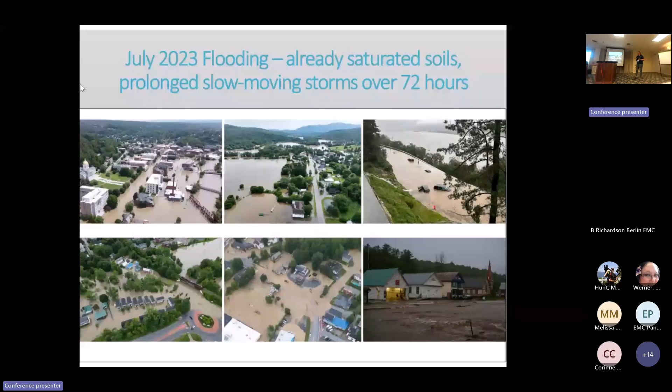This was interesting because I showed this last year at the National WARN Conference, and I was thinking, Florida sees 22 inches of rain all the time, and we only got 9 inches of rain, but everybody was pretty impressed by that. Just with our topography, with the narrow mountain valleys, they did understand 9 inches of rain here is a lot different than 9 inches of rain in Florida.

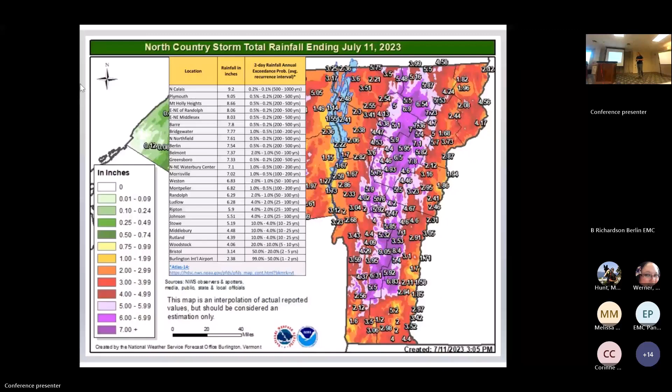So compared to Tropical Storm Irene - in 2023, WARN was activated. In 2011, I don't know if it was officially activated. There was some information sent out through WARN, but I don't think there was any equipment shared through WARN. So in 2023, WARN was activated and functioned pretty efficiently.

One specific request came in the first few days - it was a little bit of chaos. Nobody was quite sure what they needed, they just knew things weren't working. So it ended up we just had to start sending folks out to these water and wastewater facilities to get some eyes on and say, okay, where should we start? It was just so overwhelming in some of these places.

Another great thing that was different was the availability of social media and mobile technology. We talked to Brandon and Wilmington and other communities that were hit pretty hard during Irene, and they said it was just so different - now you have your phone in your pocket, you can instantly take pictures of things that are broken, do all your documentation for FEMA, and text somebody to get what you need.

Virtual meetings were also a huge plus. Having the FEMA applicant briefings online was really great for our folks, especially those at their water and wastewater plants. They hadn't left for 48 hours and didn't really have a chance to travel somewhere else besides what they were working on.

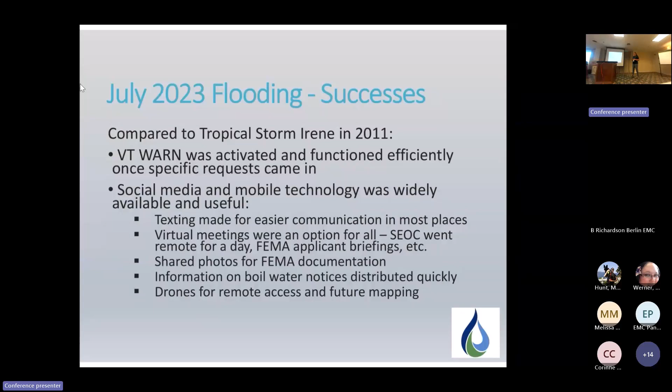Same thing with the drinking water side, the boil water notices, all of that could be distributed much more quickly. We kept an eye on what the chatter was online and on social media. Drones were available for some remote access and to help with mapping.

So, drinking water system impacts from the July 2023 flooding: there were over 20 water systems on boil water notice. Most of those were issued out of an abundance of caution. Some were due to damage in the distribution system, like main breaks, leaks, or pressure issues. Two surface water systems had turbidity issues. Some had floodwaters over their wells, or weren't sure how high the water got because they couldn't access that area.

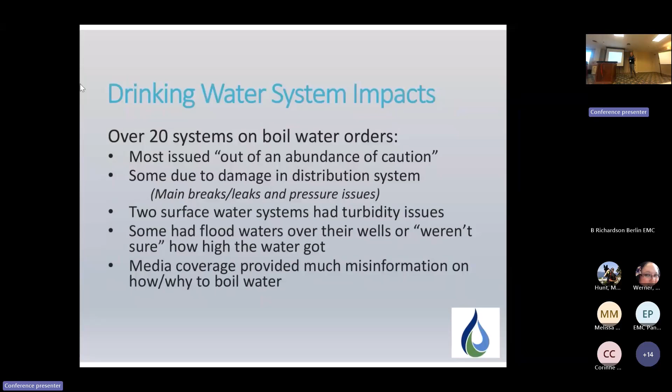One of the challenges definitely was media coverage. There was a lot of misinformation on how or why to boil water. We caught VTDigger saying that boiling water could remove fuel oil, so we quickly got that corrected. That's definitely something we want to work more with the media on in the future, just to make sure it's very clear how you need to boil your water and what that can actually remove.

So, do not drink orders. I mentioned Woodstock already, which serves about 1,700 customers and most businesses in town. The system had trouble keeping up with demand because of all the breaks and leaks they had, and they connected a non-NSF certified fire hose to fill their storage. The state did not like that, so they were put on a do not drink order until that could be corrected.

And then in Morrisville, they serve about 2,800 customers, most businesses, plus the hospital. Their sources were submerged by river flooding. The operators were pretty sure the pumps had been shut off so that water did not reach the treatment plant or go into storage, but it was unclear. Nobody was sure what happened at that worst moment.

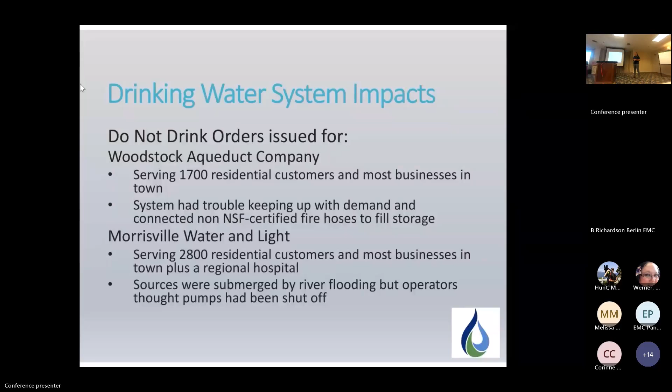So I was going back and forth between Johnson and Hardwick a lot last summer, and I really wanted a Diet Coke at the Morrisville McDonald's. Unfortunately, they were following the boil water notice. It went to boil water at that point, so they were following the notice, but no Diet Coke that day.

So at the Johnson wastewater plant, this is kind of where we started our flood response last summer. This is an SBR, a sequencing batch reactor, the type of wastewater facility - sorry, some of this is a little technical. This is a very small wastewater plant, even for Vermont: 0.15 million gallons per day coming through there.

Their entire plant was submerged to 7.5 feet. You'll see the picture in a minute. They have two operators there that run that plant, but they also run another wastewater plant and three water systems.

So this is pretty typical for a situation in Vermont. The operators are spread pretty thin, and it's hard to prioritize in some cases, like where do we start, which system do we work with first? Here, it was pretty clear Johnson had the most damage, so that's where they started.

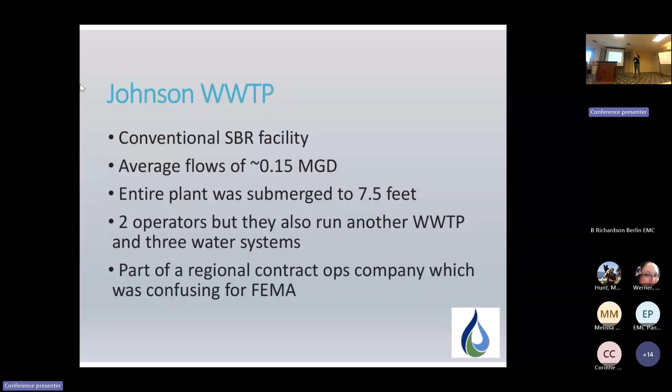Another thing that was a little different here, probably different than other states too: there's a lot of municipal systems, and a lot of other systems in Vermont are run by contract ops companies. So that's been a little confusing for them in working with FEMA, that there's this private company that runs the water system, but it's owned by the Village of Johnson, located in the town of Johnson. So it's been a lot to kind of get figured out, and as those FEMA folks turn over, it's explaining everything again and again.

So here the red circle is where the wastewater plant is. It's kind of right where the two rivers converge, so they got hit from both sides a little bit.

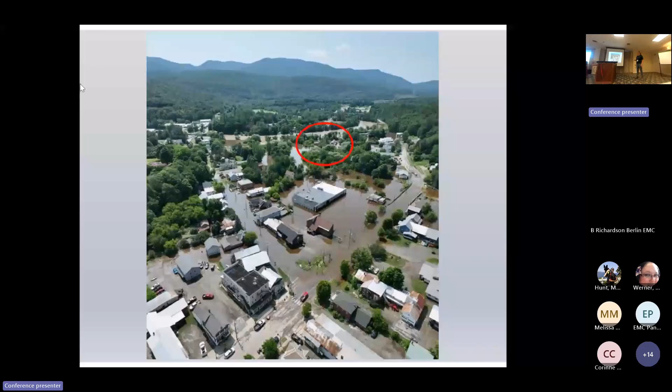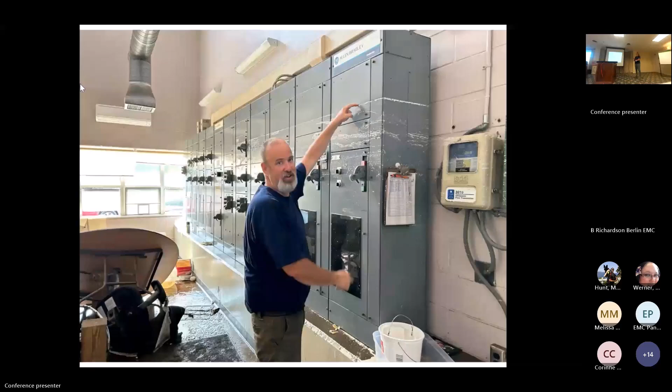Through WARN, the city of Burlington provided a 500 gallon per minute Godwin trailer to pump the decant off of their holding tanks and out of their SBRs. We also had a bunch of smaller pumps in there, a generator, dehumidifiers, and provided them some KN95 masks, again, that couldn't be sourced through other means.

The car floating in the river on Railroad Street tore off their 8-inch ductile iron sewer crossing. The replacement pipe ended up being sourced through AOT, which was great. WARN is good for the smaller stuff, but not a lot of facilities have 8-inch ductile lying around, so we had to go searching through other means. I think it did go through the SEOC to get to the Agency of Transportation.

The WARN trailer was actually used to hold a chlorine tank. The system was asked by the state to do emergency disinfection, because all across the news and media it was like raw sewage going into the river and affecting our recreation. At that point it's like 99% flood water - it's not like what people picture as raw sewage, and what you could see coming out of the pipe was clear. So it wasn't raw sewage, but they were asked again to do emergency disinfection while their ultraviolet system was down.

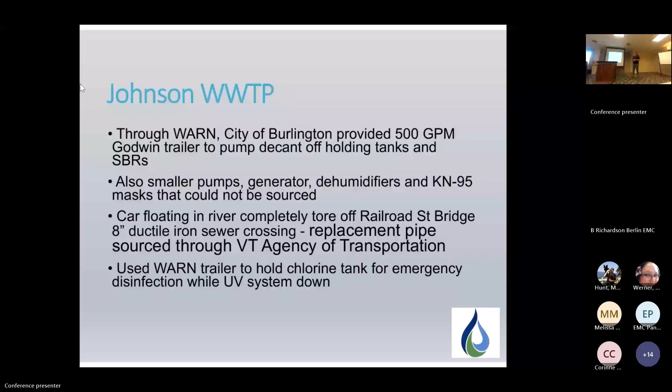So this is the brand new pump that came from Burlington, and the operator that they sent, and it ended up working out really well in this case. It's also figuring out where you can get the truck and trailer from, and then which roads are open, which bridges are open, and who has to drive the furthest around on kind of sketchy roads. So it's a little bit of a game, but this worked out pretty quickly here in Johnson.

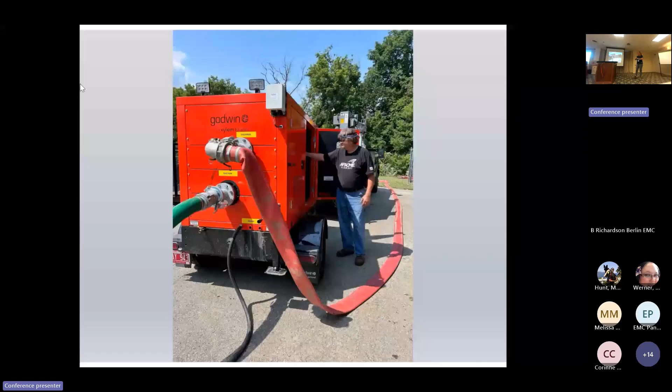How many of those are in the state? Is that the only one? No, South Burlington has some, Rutland.

I know some of the bigger systems have them, but it always comes back to - we have the equipment available, but we don't have the personnel available to drive it to where it needs to go, or to stay there and help out with it. So that's why we would like to get our own, but the bigger states have hundreds of these sitting in warehouses, hundreds of generators sitting in warehouses. We're just never going to have that in Vermont.

So this is when it was set up to do the disinfection. The chlorine's dripping down into the manhole here.

All right, next on to Hardwick. They have an aerated lagoon system, which is a bit different of a treatment process than they have in Johnson. Unfortunately, they were in the middle of a pretty expensive upgrade there. Also a pretty small plant in the scheme of things for Vermont - I would say it's medium-sized. So they had their control building, their lab, the garage inundated with floodwaters to about 5 feet here.

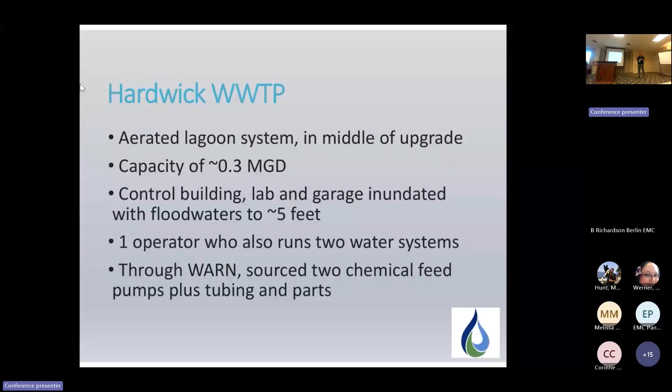Same thing, basically one operator - he also runs a couple of water systems. It's hard to do any type of flood response on your own, so you always need to bring in whoever is available, who also can get there and not need a lot of guidance. I think that's why a lot of times it ends up being Vermont rural water staff - they kind of know these systems already, so they can get there and jump in and just start doing things. Through WARN, in this case, we were able to source 2 chemical feed pumps plus some extra tubing and parts to take to the Hardwick wastewater plant.

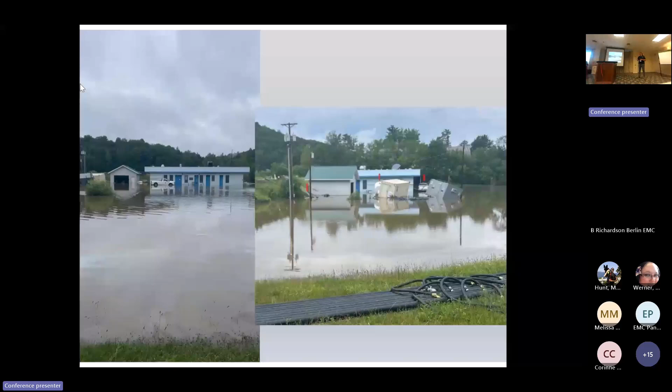So this is when the floodwaters were receding a little bit, but you can see the Connex boxes tipped over. This was all part of their construction that was happening there. There's our trailer that we took there. In this case, they just needed a dry and clean space to work in, so they set up some laptops and put some equipment in the trailer, because everything else was just a mess. You couldn't work anywhere else.

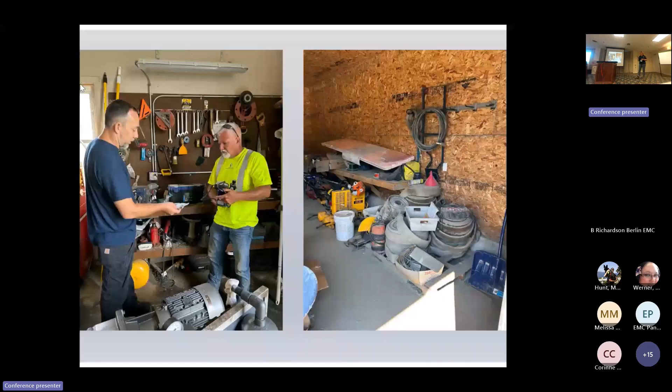Here's grabbing, this was from Barton. We grabbed some of the chem feed pumps. And then Ludlow, this is kind of the last of the big three that were impacted in that July 2023 flooding. It's an aeration plant.

This is a little bit bigger of a plant. Their challenge is that their flows vary a lot depending on the ski area and the seasonal residences. So it's designed to treat a lot more water, but on a daily basis, and in the summer, it's definitely not anywhere close to where their permitted flow is. So they had the most visible damage there due to the strong current and boulders, and I think even a car was pushed partially through their wastewater treatment facility.

There they have one operator and two kind of assistant operators. Again, they also run the town water system and manage the five dams. So they were told the dams were the priority there last summer, so we basically sent one of my staff to work there full time for a couple of months to work on the wastewater system to get everything back up.

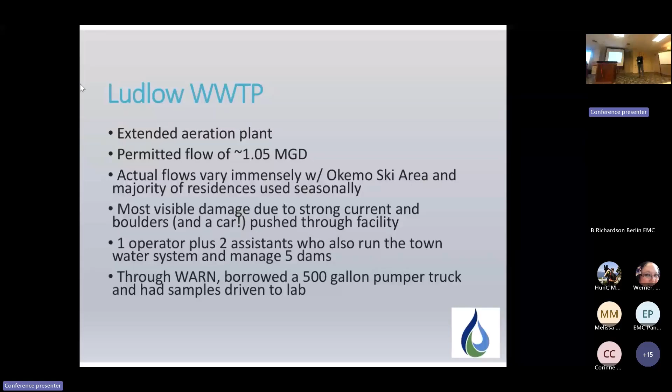And through WARN in Ludlow, they borrowed a 500-gallon pumper truck, and they had some of us running their drinking water samples up to the lab. For them to take four hours out of their day to go drive to the lab is not really a good use of their time.

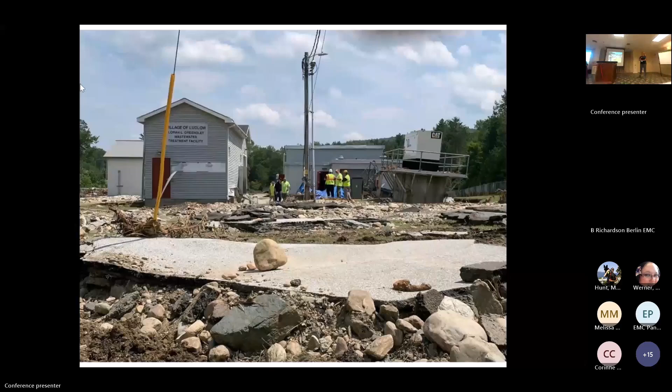So here's Ludlow. They had raised their generator after Irene, but it was still taken out by this flood also. Here's the pumper truck, not very big. We need a bigger one. That's what we decided next time. That's on our long-term wish list.

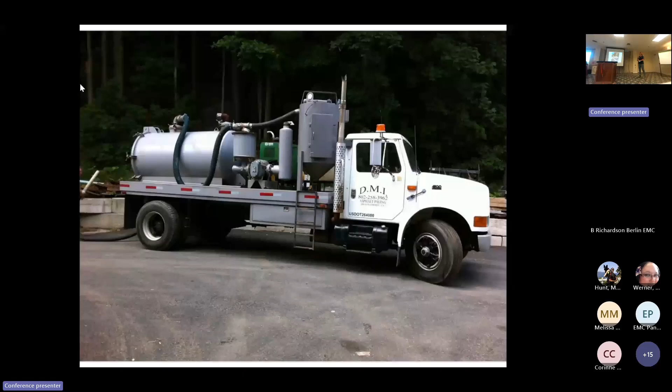And they also had a need for some pipe. They also tried to get it through the SEOC. So the challenge in this case, there was pipe available through a private company, but they said they weren't gonna, I can't remember where the truck was, somewhere far away, but they weren't gonna run the truck to Vermont until the truck was full. So we had to get some people that had more clout than we did to make some calls to get them to just bring the pipe, like, we need it now.

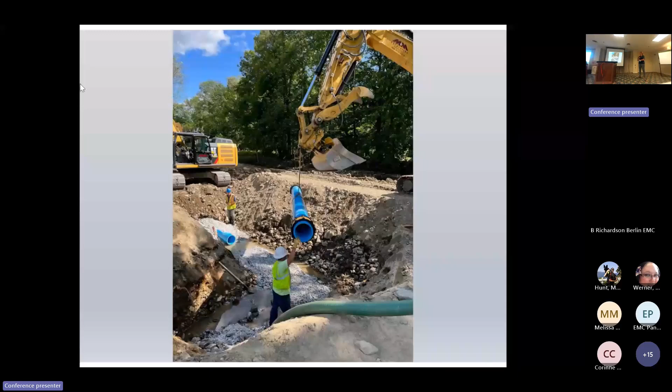So Vermont WARN connects systems to share equipment and resources, like I've mentioned, but the needs were constantly changing. In a lot of cases, the needs were changing faster than we could respond and try to find whatever equipment was needed.

We have an online form. The Agency of Natural Resources hosts our website, and there were some requests coming through that. A lot of requests were coming from DEC, the drinking water and wastewater staff, calling around to the impacted systems and saying, what do you need? What can we get to you? What would be helpful? And then again, my staff out at the systems calling me like, I think they need another pump. Can you see what you can do?

So again, the challenges, like I mentioned before, Vermont systems are fiercely independent, still trying to change that stigma. They don't want to ask for help. They don't want to go through any kind of formal official channel. They just want to go help their neighbor and not say anything. They don't want credit for it, but again, this poses the issue for reimbursement and liability. And again, we're seeing more and more safety issues occurring as these floods are just more intense and more frequent.

So again, everybody kind of just knows each other. They're just gonna text their buddy to see, but in these situations, they don't really have a lot of time to just spend on the phone calling around, seeing who has what. That's what we ended up doing in Plainfield, was just kind of the first day standing there, just making calls and texts and like, all right, who has this? Who can get here tonight? Who can get here tomorrow? It's just very time consuming. And when you have one or two operators trying to do the actual work, they need somebody else there.

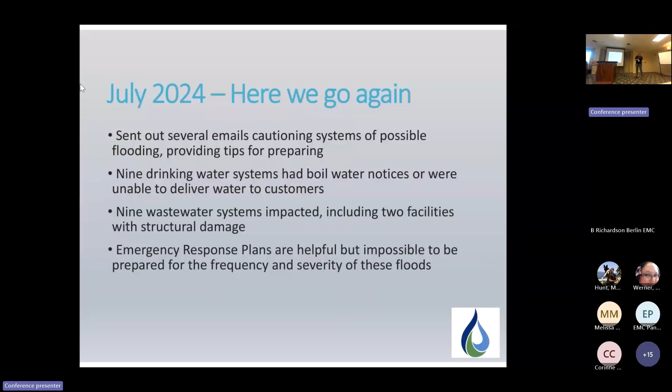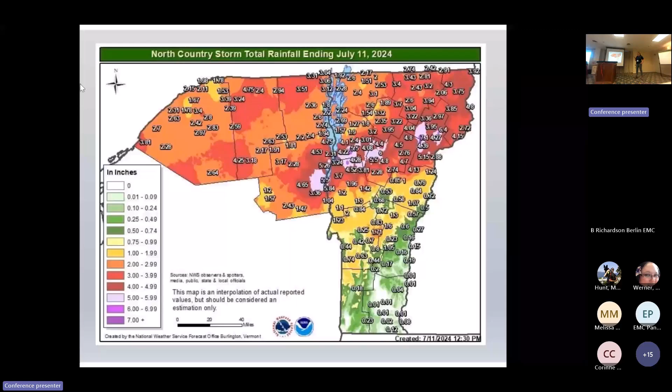So we're encouraging everyone, and we're going to be having some workshops next year to really make those plans based on what we've seen in the last 2 years. Storm totals were a little bit less than they were in 2023, but we all know what the impacts were this time. So Plainfield was our focus in July this year.

They had very extensive damage to their distribution and collection systems. It was complicated by both of those systems being entirely gravity-run pipe infrastructure. It's hard to explain, but usually you have pump stations that pump water or wastewater up and down hills. But Plainfield, I mean, it's kind of neat, they had it all worked out that it's just all gravity. But that made it complicated when there were main breaks.

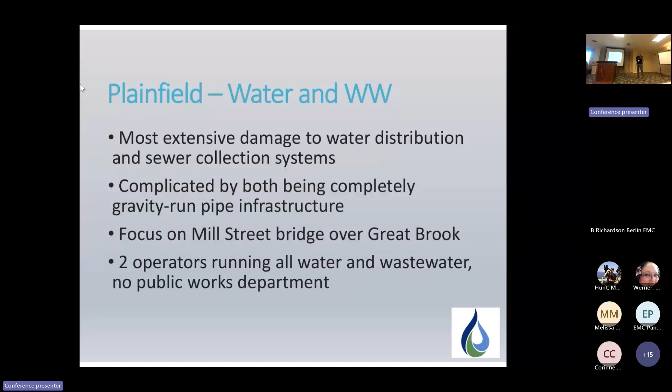So the biggest focus was Mill Street Bridge over Great Brook. Here you have two operators running all the wastewater and water components. There's no public works department there. So they needed to isolate sections and install temporary water and sewer lines.

It was a little confusing because the timing of the temporary bridge coming in kept changing, and we weren't sure when it was going to happen, if it was going to happen, or if there was going to be a permanent bridge. It's just, when might that happen? So what you do for the water and wastewater lines is greatly dependent on things like, do they have to overwinter? Are we going to have to figure out how to keep this water line moving over the winter so it doesn't freeze up?

Luckily, wastewater is a little warmer, so you don't have to worry about that. So we sourced hoses for their pumps. We did get a vactor truck from Essex Junction. They sent somebody in on a Friday night, which is great. Safety equipment, again, that was a big thing there. The basement of their wastewater plant kept filling with propane, so we had to get some blowers and gas meters in there.

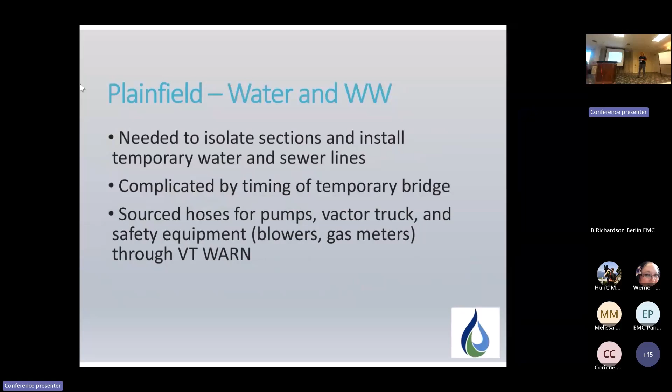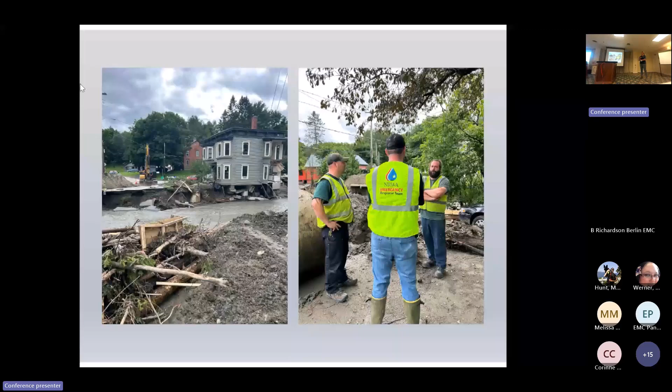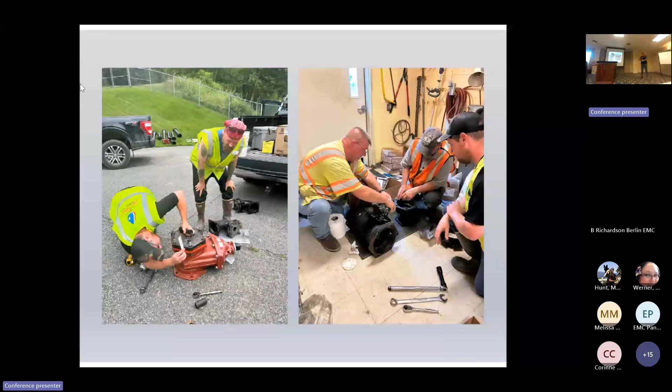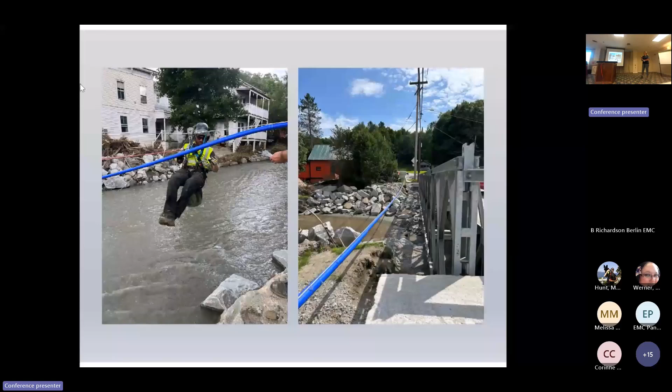And then this, can't really see it as well, but anyway, there's a blue line you can see on this one. This is once the temporary bridge is in. The blue line is the wastewater sewer line across there.

So again, we're still having a lot of meetings, like what needs to be done before the winter hits, what's the priority, should we keep the system structure how it is or reroute things. It's just constant discussions.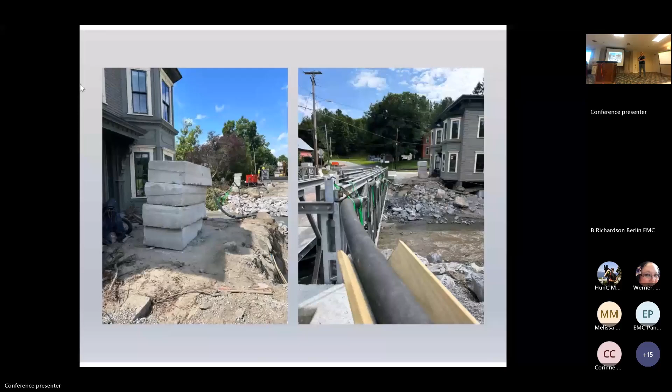And then in the late July flooding, we helped with the absorbent booms again at the Lyndon wastewater plant. There were a lot of facilities that just needed some extra treatment chemicals, so transporting those back and forth.

And then the St. Johnsbury water plant was struck by lightning, and that took out some of their controllers, which wouldn't have been a big deal since they can run things manually. But there were high turbidities in their source water because it's a surface water source, so they had to frequently backwash their filters, which meant somebody had to come in every 4 hours, including overnight, which they weren't too happy about, especially after a week or so. They're like, this is getting real old real quick.

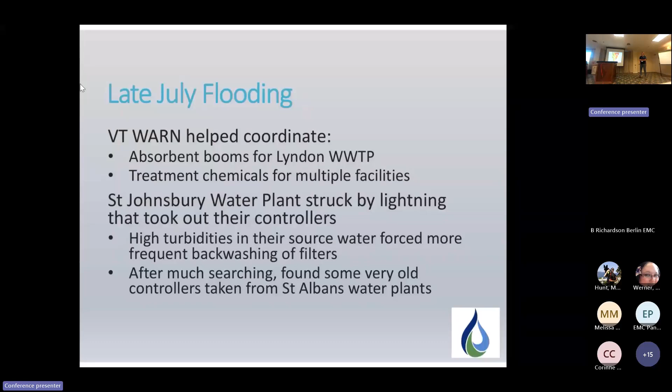So it took a lot of searching because the controllers they had were very old. They couldn't just replace them with newer controllers, they had to be the original controllers. The company had already rebuilt them once and said they weren't going to do that again. So we had to have a lot of folks dig through their junk piles, as they call them. In the end, we did find some old controllers taken out of St. Albans, they have 2 drinking water treatment plants that we were able to use.

Again, we're seeing much lower rainfall totals having more severe impacts. So this is something that we're going to have to be incorporating into all of the emergency response plans.

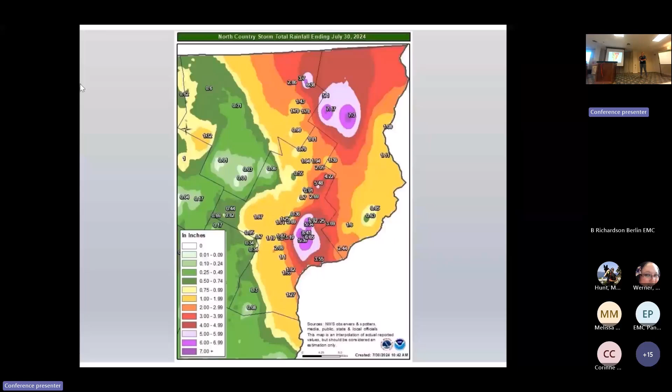So lessons learned: move as much as you can out of the floodplain. It seems pretty obvious, but even Hardwick lost their computer in July 2023, and unfortunately that operator was on vacation. The backup operator didn't even think about it. They lost their laptop again in July 2024, just because they didn't take the laptop home with them or move it up to the town office.

So vehicles, equipment, supplies, paperwork, that's a huge thing. We have a lot of systems where all of their mapping is still paper. They're trying to get it digitized, but it's a very slow process. Store file backups in a different location. Again, Johnson had everything on an external hard drive, but it was sitting in a drawer next to their computer where everything got flooded.

Closed valves on fuel tanks. This was definitely something we need to talk more statewide about, is that the amounts of fuel oil or just all these different chemicals coming into these wastewater treatment plants and accumulating there is a huge issue and a huge safety issue for these operators. I think we just haven't talked about it enough.